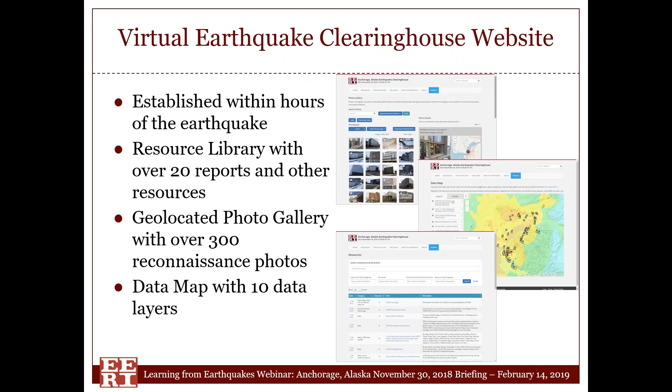Those photos and the associated data map where they're displayed includes 10 data layers and have been informed by many different reconnaissance tools. EERI has some new tools that we're using to collect data that we had colleagues in the field using, and we're able to incorporate data from EERI colleagues as well as many others and overlay this at this one go-to place for earthquake information. So I encourage you to visit this website after this briefing if you want to learn more or dig into those resources.

We also had a virtual earthquake reconnaissance team deploy after the earthquake. This is a new aspect of EERI that we've been developing for the last couple of years, where we have a whole team of volunteers that are ready to activate immediately following an earthquake. And what they do is they start by developing an overview of the impacts, doing a thorough internet search of all the online resources, from social media findings to online reports to any technical announcements that we're seeing from the emergency management field, and they compile it into one big overview to help the Learning from Earthquakes program define their activities, but also to inform the broader membership.

We also have this team of virtual volunteers who are ready to activate, and we offered our support to other teams and colleagues in the field, and many of them volunteered to help two particular activities. They supported USGS researchers who are studying human behavior by gleaning a variety of internet sources to find video of the human response to earthquakes. They also have been supporting EERI's business impacts team that I'll describe in a moment, to gather a list of businesses that have been impacted by the earthquake and suffered damage. So it's a great volunteer effort, and I thank all the VERT volunteers who helped pull together these resources.

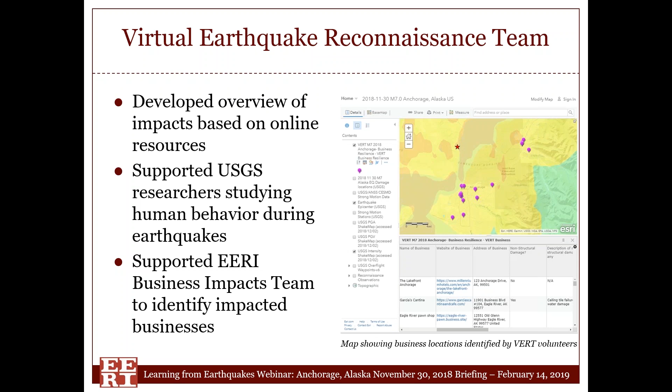As I said, we also hosted our Clearinghouse Briefings. This was on behalf of the NEHRP agencies with participation from many colleagues. We had over 100 participants across 10 different Clearinghouse briefing calls. First, they were happening every couple days, and then have expanded in time, and we even had one as recently as January, so that as the information and findings and response continues to this earthquake, we can continue to monitor that over time to inform the broader earthquake community. We also supported and collaborated with 12 reconnaissance teams that joined our briefings to coordinate and collaborate and identify ways that they could align their work.

We're also launching what we're calling a business impact reconnaissance team. This is a program that we've been working on, and after 2 pilots for earthquakes in the South Napa earthquake and Cushing, Oklahoma, we're now deploying our business survey again. The objective is to correlate physical damage to businesses, from their lifeline impacts to physical damage and loss of inventory, and then correlate that to how that affected the operation of their business. And using it as a tool to see if we can measure and better understand the keys to business resilience, what makes some businesses more resilient, and what aspects really were beneficial in their response, and seeing some of the cascading impacts of the many different aspects that affect a business operation.

This is a well-established survey that we've developed through a group of volunteers over the last several years at EERI that we're hoping to deploy again after future earthquakes. It actually has a series of surveys that can be deployed over time, and the first round of the survey for Anchorage, Alaska will be deployed in February in person by a small team, including some volunteers from Alaska, from our regional chapter.

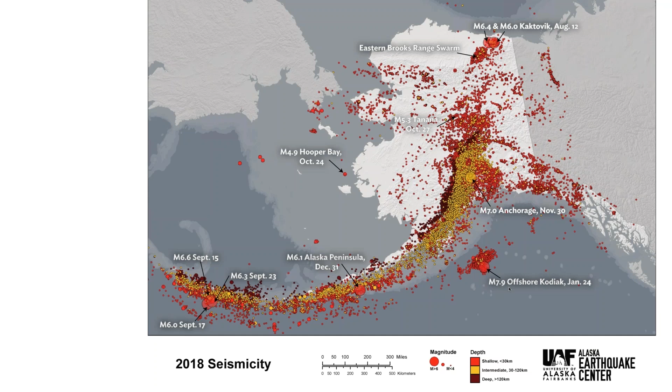The earthquake that occurred on the 30th was fully consistent with historical seismicity. I can't say that anyone in the geosciences was necessarily surprised by it, though certainly the magnitude and location, it is not a common occurrence. If we look at the figure here on the screen, we're looking at earthquakes of all magnitudes recorded in Alaska over the past year. So this is 2018 seismicity. And I put this up to provide some context for where the November 30 earthquake occurred.

The color coding on this slide, red earthquakes are shallow, basically crustal. Yellow earthquakes are intermediate depth, say down to about 120 kilometers, and then the maroon ones are quite deep. And that transition where the November 30 earthquake occurred from red to yellow to maroon illustrates that this occurred on the downgoing Pacific plate. We'll take a look at that in a minute. But it's really quite consistent with historical events and smaller magnitude, day-to-day, if you will, seismic activity.

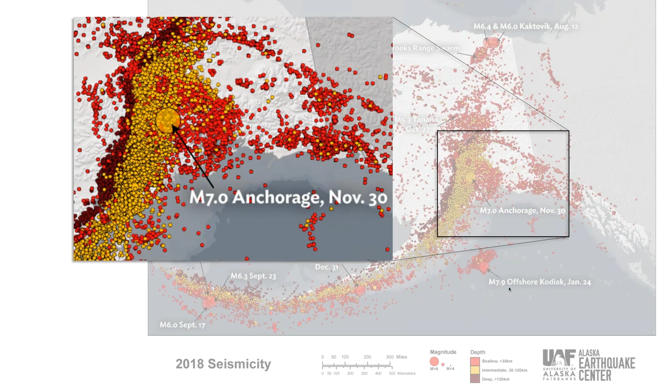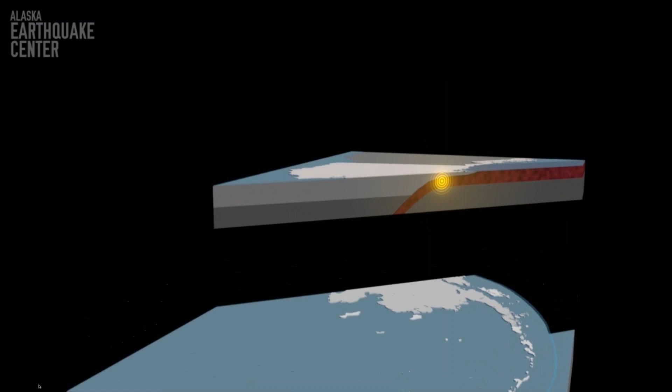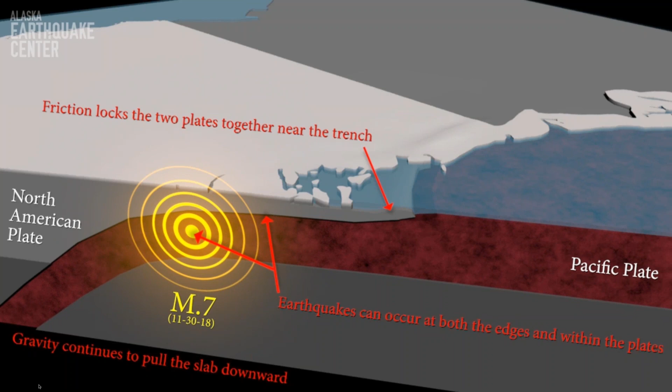But if we look at the two plates which come together in Alaska, do a little cross section and look at the Pacific plate as it subducts beneath North America, the location of the November 30 earthquake shown there demonstrates to us that it occurred further down dip than the locked zone, the region where we see big subduction zone earthquakes like 1964. This was more inland or more inboard or down dip, however you want to phrase that.

But it is fully consistent with earthquakes. Even just a few years ago, there was a similarly sized earthquake a little bit further to the southwest, magnitude 7.1 in January 2016, at these what we would refer to as intermediate depths.

Moving on to the next slide here, this is a cross. Oh, actually, I wanted to point out one thing. Forgive me for backing up here, but something important. You should have in front of you now the slab contours figure.

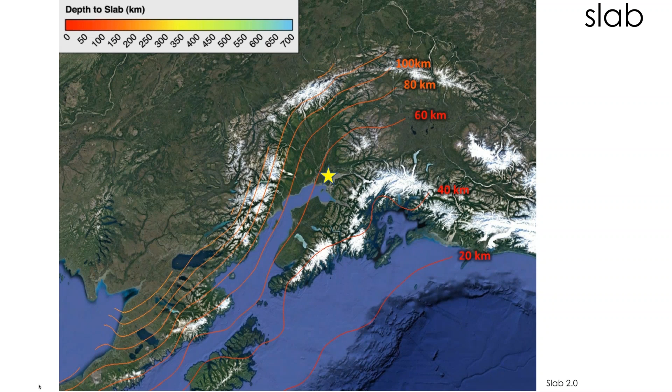And what I wanted to point out is it comes as a surprise to some people that the direction of subduction in this area is primarily to the west. We think of the Pacific plate often as kind of moving northward, but here there's a bend in the plate, and so the down dip direction is actually to the west or slightly west northwest.

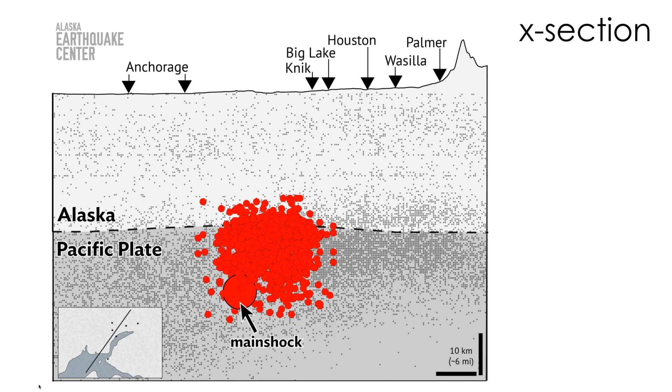And it also shows that the main shock, this magnitude 7, began at the southern end of the rupture, and over the course of several seconds, ruptured upward and toward the right of this figure. So the area kind of mapped out by all of the subsequent aftershocks. So the earthquake began closest to Anchorage, and over several seconds ruptured about 20 kilometers of fault toward the north and away from downtown Anchorage.

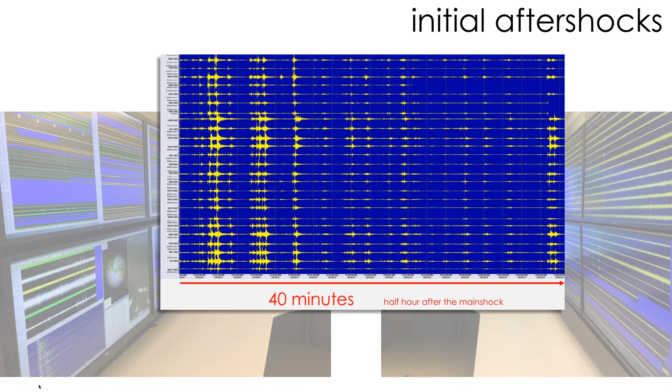It's been a very vigorous producer of aftershocks. This is a shot we're looking at of several seismic stations around the Anchorage area just in the hour following the main shock, at which point in time aftershocks were occurring at least every minute, not necessarily large enough to be felt, but a good percentage of those were.

There's some anecdotal evidence that aftershocks have done some additional damage in other areas. I'm actually hoping that other speakers might touch on this. Wink, wink. We've certainly heard that from people anecdotally, but I'm not sure of any systematic survey.

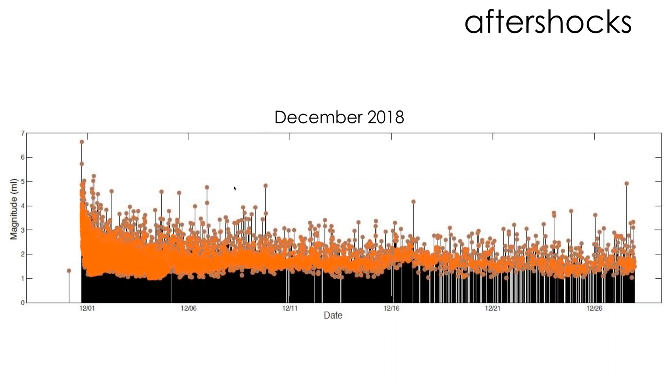If we look at the rate of aftershocks over the first 2 months and project forward, if the rates we've been seeing remain steady, or those patterns remain steady, we expect that within about a year, it will become difficult to distinguish aftershocks from what you might call the routine background of earthquakes that we are accustomed to in this area. It's not an aseismic area. There's plenty of earthquakes month to month, year to year, and we're anticipating within about a year we'll be playing that game. Was that an aftershock or was it not?

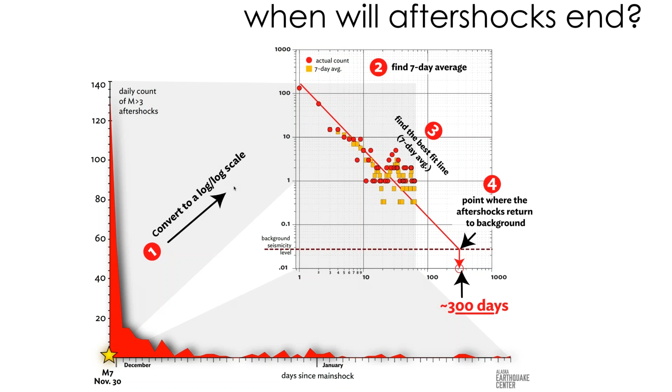If this is not a view of fault mechanisms that you are accustomed to seeing, essentially these are classic, very clean. If these were on the surface, we would call them normal faults. Personally, I hesitate to use that word when it's embedded inside a tectonic plate that is deep beneath us, but I think they should be thought of as normal faults. And what they tell us is that those are likely related to extension or tensional forces within the plate. We'll look at a figure in just a moment of that.

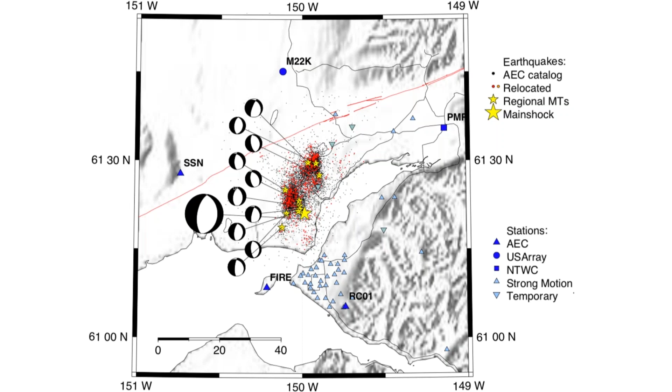So some combination, as this plate is pulled into the earth, of either tension or bending forces within the plate. I will say at this point in time, there's some evidence that the rupture extended beyond a single fault plane and perhaps involved some motion on two different faults. That is an area of ongoing investigation, so stay tuned.

One last thing I wanted to point out about the depth of these earthquakes and this particular mechanism, the reason I'm dwelling on the tectonics, is that there's nothing to map. These are not faults that you can go out and trace on the surface of the earth. They are not features that you can study geologically. And so they present a very real challenge for seismic hazard analysis.

We really have very little understanding of, well, I guess we know the where, but when earthquakes and of what size earthquakes like this can occur. It's a different breed of earthquake than the crustal and the shallow features that we are accustomed to being able to measure and integrate cleanly into seismic hazard analyses. With these earthquakes, in many ways, all we have to go with is a relatively short historical record.

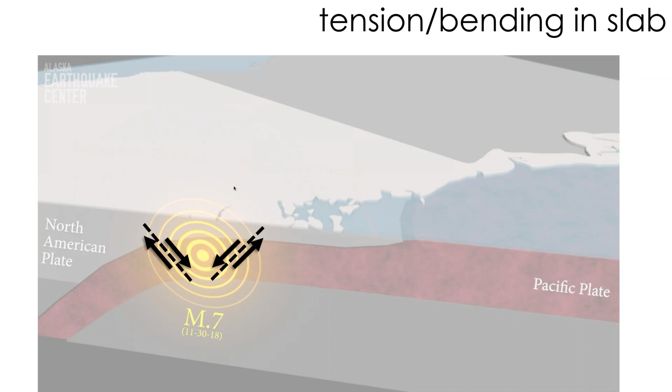So unlike a major crustal fault, where we might say, hey, we just had this very significant fault, we're going to consider that section of the fault relieved for now, and maybe we'll focus attention on the surrounding areas. We really don't know what's going on here. It's very hard to speculate on what future earthquakes could or could not look like in this area, or how this particular event changes that understanding.

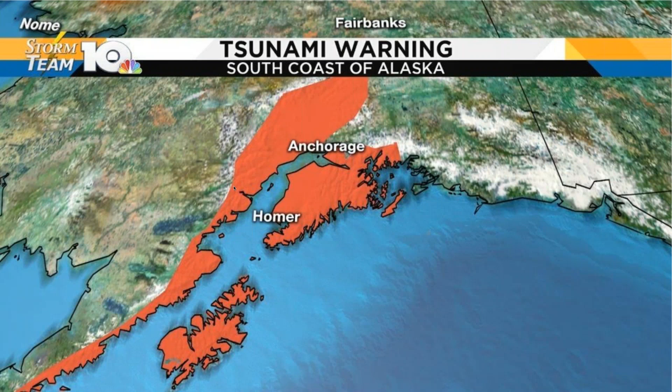There are quite a number of coastal failures that we have seen in previous earthquakes that I wouldn't have wanted to be down on the beach on this day, at least not nearby. There are clearly some lessons learned about the delivery mechanisms of warnings. Clearly, the warnings are being spread a little too far to people who certainly don't need it. However, the basic call to issue a warning was, in my opinion, prudent.

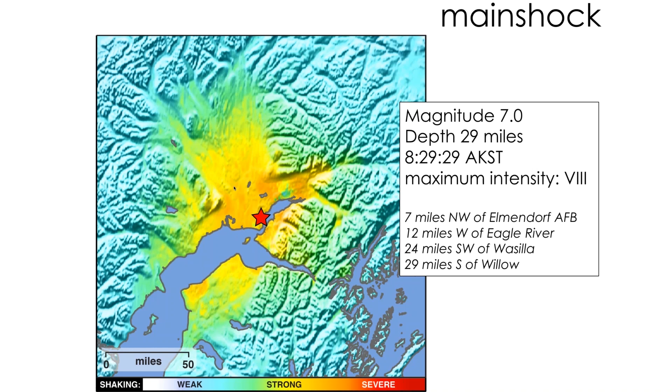This is a magnitude 7 earthquake, but we did not see the most extreme shaking that can occur from a magnitude 7. We are fortunate, I think some other presenters may touch on this, but we do have good instrumental recordings around the downtown Anchorage area proper. That has seeded a lot of very interesting follow-on research to this event.

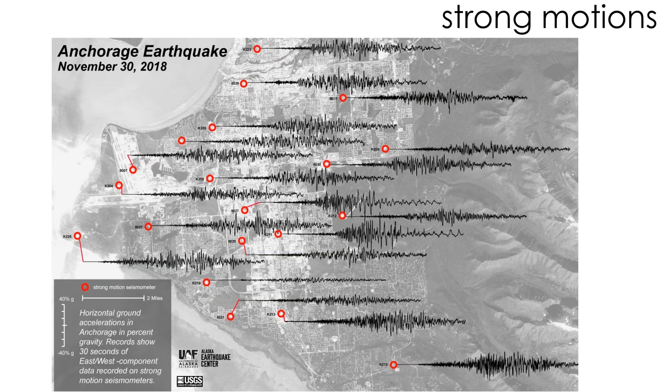I would point out that once you get outside of Anchorage proper, the quality, the availability of instrumental recordings goes down precipitously. As we worked to put together peak ground acceleration maps and similar products, we were certainly stretched to find suitable data to include outside of Anchorage proper.

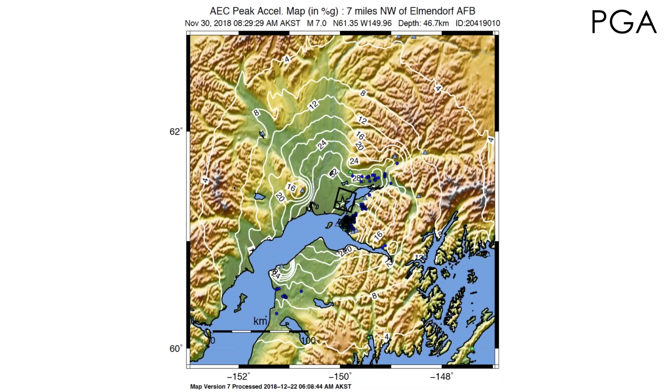The products that many people are using, the ShakeMap distributed through the USGS, we made a conscious decision to include in that Did You Feel It reports. The suitability of that is still debated by some people, but we made a conscious decision to include those in the numerical calculations here because of the sparsity of data in outlying regions like Eagle River, Palmer, and other areas.

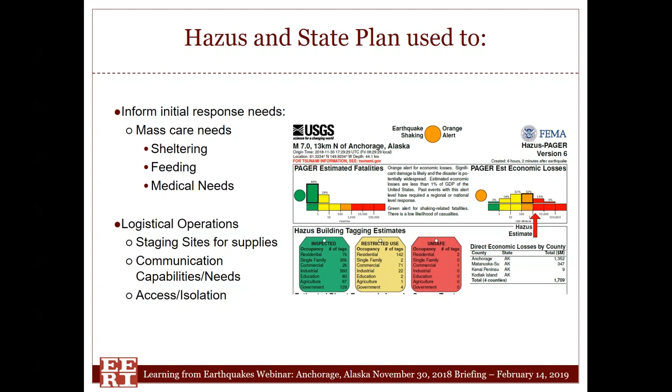And then we also have our own logistics group that coordinates directly with the state's logistics team to identify areas for staging supplies, bringing out communication capabilities such as sat phones if needed, and then looking at, are there areas that are isolated? What do we need to do to be able to access them and get them needed supplies? So the PAGER report is incredibly useful for us. The Hazus report and the modeling done by our headquarters modeling team was also very helpful.

We posted the information from our modeling onto FEMA's GeoPlatform, as well as in an earthquake incident journal. And I've got the link for this up here. For those of you that have the slides already, I've made some updates with pictures and a little bit more information. But this link should work. I'm working with our GIS folks to better understand what information we can share and what we can't.

PII information, personally identifiable information, can't be shared. And you know, we don't want to spread information that is not field verified either. But there are some pieces of this earthquake incident journal that are publicly available. So you can click that link and see what comes up for you.

But initially, we were using the Hazus and the PAGER information to see, based off of the model, what areas were likely to be most impacted. And I'll get into that a little bit more in a moment. But you can see we were also pulling in the municipalities' information on red, yellow, and green tags for buildings being inspected.

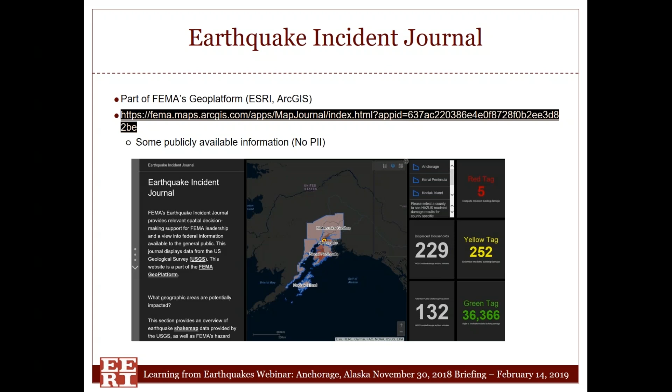So this part is some of the red tape that you might hear about, but I wanted to talk a little bit about the disaster declaration process. So when the event happens, the initial earthquake, the state makes a preliminary damage request. And upon initial event, there isn't a presidential declaration yet. So you'll hear words like emergency proclamations or maybe a local emergency declaration, but those are not the FEMA declarations signed by the president that issues funding.

So in order to get the presidential declaration, there's some steps that have to happen first. So the state will make a PDA request, which is preliminary damage assessment, and that brings in local and state partners, as well as the Small Business Administration, to go and do inspections for both public infrastructure as well as individual, which would be residential. In this instance, FEMA actually came along and did the PDA inspections with the state and local and SBA, which isn't typical, but it really helped us expedite some of our processing.

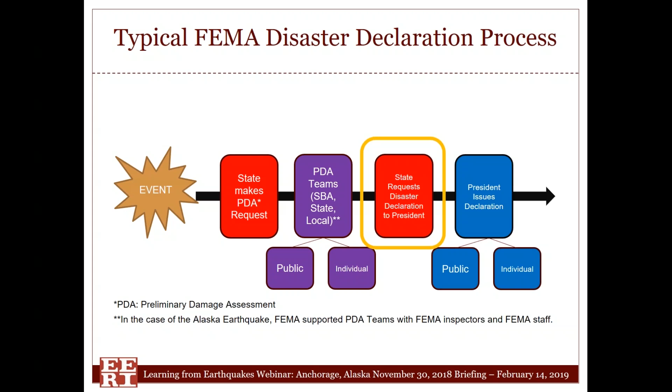Based off of the preliminary damage assessments, it was determined that the cost for the disaster was $48 million thus far. And again, that was with the focus on the high damage facilities. That doesn't include all the little things that weren't inspected, because we were only focused on the big number things. But through the Stafford Act, there is a threshold that has to be met that states that the amount of the damage has to exceed the state's capabilities, and that's determined by census numbers multiplied by a factor of, in this instance, the per capita indicator of $1.46 per person.

So the state made that disaster declaration, and the shutdown eventually ended. We'll find out more tomorrow about that as well. But the declaration was made by President Trump on January 31st, and that provides public and individual assistance for 3 boroughs. It includes the municipality of Anchorage, the Mat-Su Borough, and the Kenai Peninsula Borough. And one fact that a lot of people don't realize is when there is a statewide disaster, there are disaster funds, but hazard mitigation money becomes available statewide, and that does include tribal lands. It is up to the state's discretion where that money gets spent, and we'll get into that now.

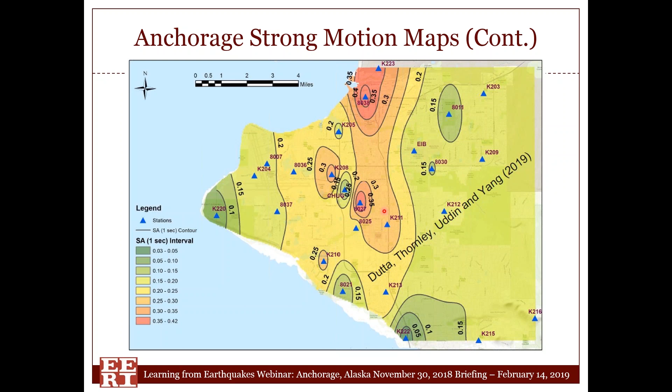The geotechnical damages were not just limited to Anchorage, of course. We had quite a variety of different geotechnical impacts around south central Alaska. Numerous structures were impacted by ground failure of different types. We did see liquefaction. And we also saw some lateral spreading, and some of the lateral spreading may have been a result of having that frozen crust over a liquefied zone.

Settlement of poor quality fill materials. We saw numerous indications of fill materials that had settled due to the ground shaking, causing a significant impact structurally to residential structures primarily, but we saw this in commercial and public buildings as well.

Then we saw a number of slope displacements as well. We saw these primarily in fill materials, but there were a few natural slopes also that had indications or showed signs of movement.

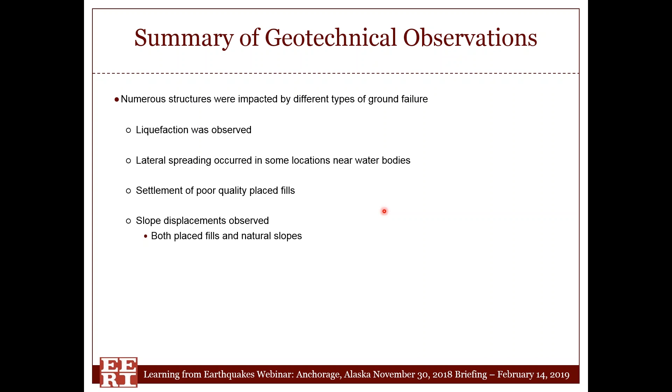Interestingly enough, talking with the USGS, who did a number of flyovers to evaluate slope instability reactivation from some of the 1964 slides. They wanted to see whether those had reactivated, and saw very little sign of reactivation of those slopes. And so the primary bad actor tended to be in the fill slope area.

So talking a little bit about different elements of the geotechnical impacts, a lot of people saw liquefaction within their crawl spaces. Floor slabs in residences were found to settle in some areas, and clean sand was found as ejecta, both in structures and in neighborhoods.

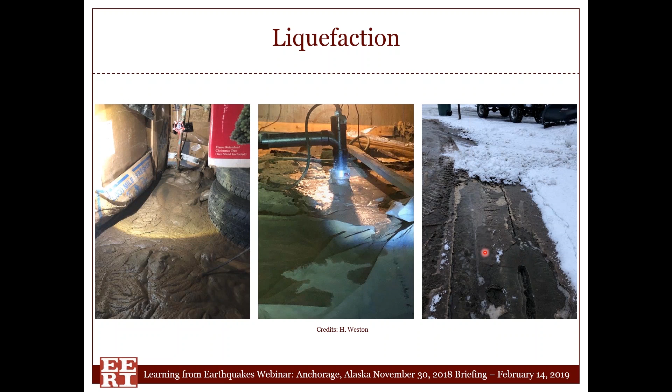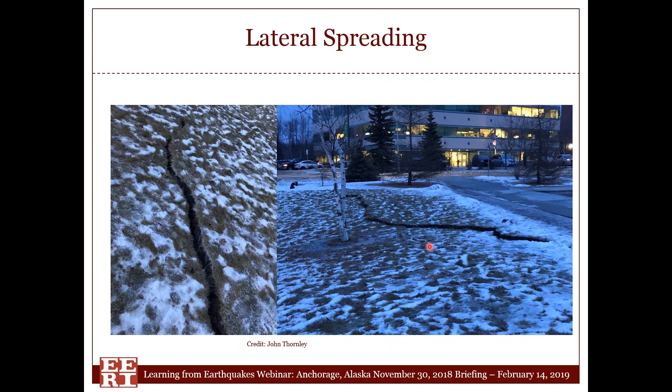Saw some lateral spreading. Most of the lateral spreading that I'm aware of was fairly minor. This is an example of a poorly placed fill material that moved laterally towards a pond within the Anchorage area. The cracks were roughly 4 to 5 feet deep, but only a few inches of vertical displacement and lateral movement. So lateral spreading did occur, but was fairly minor in locations observed.

Oftentimes, we pride ourselves in Alaska for the off-the-grid nature and kind of the frontier state. And so when you have an uncle or someone with a piece of yellow iron, a grader or something, and they help you build your building pad, maybe you didn't get compaction testing and verification of proper fill placement as you go to build on these areas outside of the building service area, certainly, as Amanda pointed out. And so there is some concern there that while maybe the house was built to code, the soils that supported them may not have been, which then caused some damage.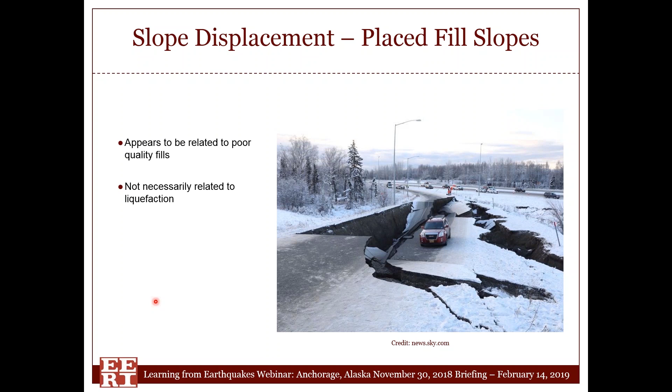Slope displacement again, relating to poor quality fills potentially. Another poster child photograph of the interchange going to the International Airport for Anchorage. Somewhat busy area, but again, not necessarily related to liquefaction, but potentially soft ground and poorly placed fill materials.

Lateral displacement of fill slopes. We seem to see quite a few fill slopes that have displaced, some of them more significantly than others. In this photo, you can see slope displacement indicators at the top of the slope, but also coming back towards the house. And this was fairly common as people expand their lots and push materials out.

Some of the questions about this fill placement are proper or improper native slope preparation. Were good practices imposed with benching and keying in the slopes, removing organics off the original slopes, and other construction-related practices? And so as engineers go to study some of these things and to help homeowners and other owners of structures get back on their feet, we'll be seeing more results of whether we had improper fill placement or not. And we primarily saw these in residential areas as well as roadway embankments.

And a little side note on the roadway embankments, oftentimes with AASHTO design, if we have a low factor of safety from a numerical model, a factor of safety below 1, then we can also design for displacement. And so when we have accelerations like we saw from the November 30th earthquake, when you do a back analysis, it's not a real surprise that we saw slope displacement on some of these steeper slopes, 1.5 to 1 to 2 to 1 slopes, that indicate in our calculations that we should see some movement. We're not terribly surprised that we do see some of those movements.

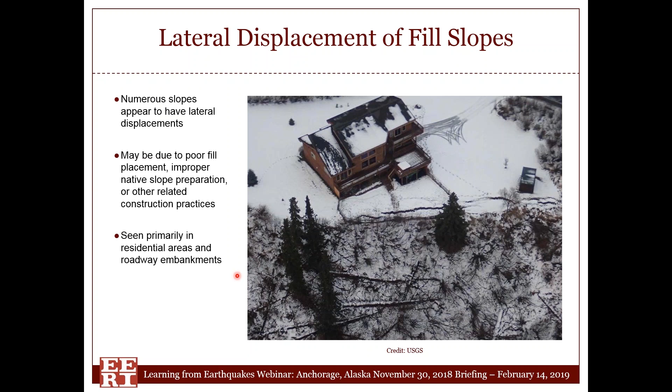Natural slopes: there were very few natural slopes that actually moved or were observed to fail. This is a photo of one of them in the south part of Anchorage, where upon further investigation you can see in this photo that there was some movement there, but a lot of this primarily had to do with saturated slopes. And in areas adjacent to these, not seeing seeps come out of the embankment, you can assume that maybe they were a little drier and had less saturation. But again, there were very few natural slope displacements.

One of the significant differences between the 1964 earthquake and the November 30th earthquake, other than magnitude, was the duration of shaking. The shaking lasted for roughly 20 to 30 seconds, whereas it's documented that in the 1964 earthquake we had greater than 4 minutes of shaking. And so if we had gone for, say, another minute or two, we might have seen further damage to these natural slopes, but we just didn't quite see that. And probably for the benefit of South Central Alaska too.

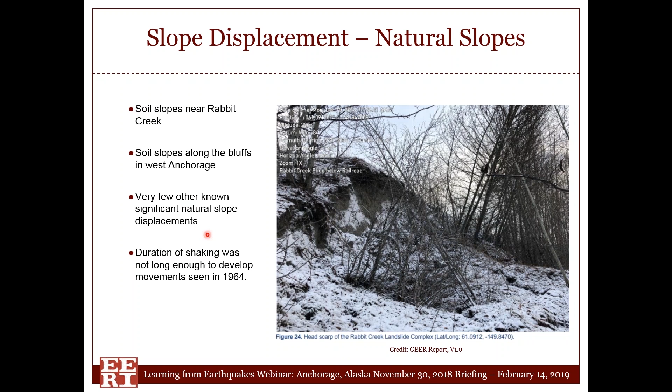Touching on buried utilities, Anchorage Water and Wastewater Utility recommended boiling water for several days after the earthquake due to some water line damages. There is a work in progress right now to collect that damage information, and EERI will be tying that into our summary report, so be looking for that. But there's, as I pointed out in the liquefaction slide, a number of connection issues with residences and others due to some liquefaction damage. But all in all, there appears to be a relation between older water and wastewater utilities and some of the damage that was experienced. But more to follow on that.

One kind of interesting, not on your typical track here, is the impacts to water wells, and there were a number of observations of dirtier water in the days following the earthquake. A surprising number of people are on community wells or individual wells, even within the Anchorage Bowl. And then as you move outside of Anchorage, nearly everyone is on a well

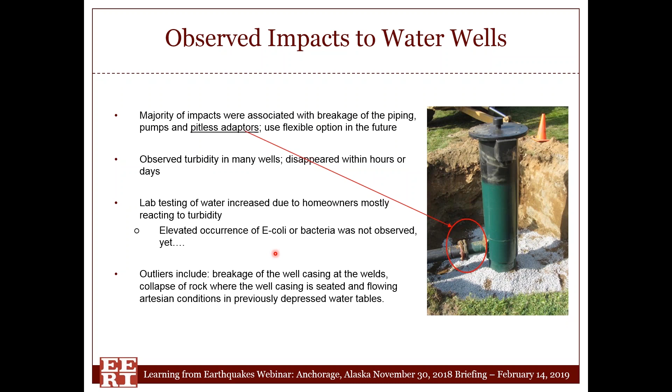that's not in some of these more built-out areas. And so there were some issues with pitless adapters shearing off, observed turbidity, and then the lab testing suggests at this point that while there was an increase of testing, there hasn't been an increase in E. coli or bacteria. But one thing that's worth noting is that in the spring, as we start getting surface melt and other things, we'll see potentially if there are other impacts to water wells.

So in conclusion, the earthquake highlighted the importance of geotechnical best practices. There is significant structural damage that's been attributed to geotechnical failures, and the ground motions, at least across the Anchorage area, varied certainly with geology. And as we continue to work with others to look at the strong motion stations outside of Anchorage, I'm sure that we'll see something fairly similar to that.

Liquefaction, lateral spreading, poorly placed fills, and some slope failures are the primary geotechnical failures. And then impacts to buried structures or buried utilities are a work in progress. And just to point out, this 12 inches of frost that we had may be masking issues that we may end up seeing more of in the spring as seasonal frost thaws out.

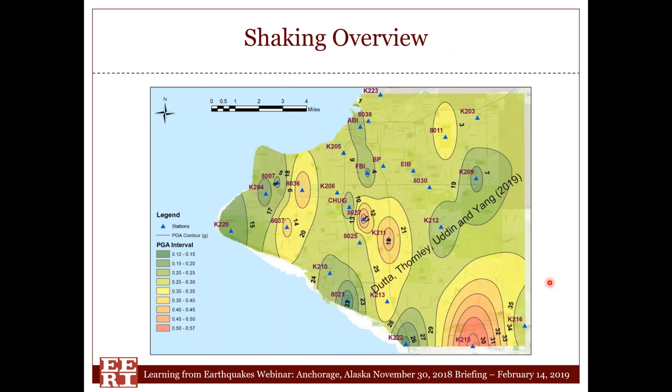It's very important to note here that the level of enforcement varies a lot between different areas. Anchorage is the most well-enforced region compared to the other cities north and south of Anchorage, and other boroughs in Alaska. So that might help explain the different types of damage we've seen around the area. I'm not going to go over details of the shaking map again, but I'd just like to do some correlation to the observed damage.

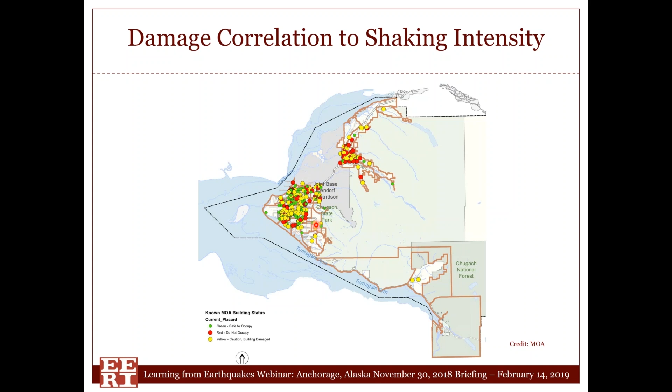So we can see here the municipality of Anchorage inspection map in the south. Here we see Anchorage, here are the northern communities, and that's about 10 to 15 days after the earthquake. And we see here the distribution of red tags versus yellow and green tags. If we close up a little bit, this is Anchorage on the left, and these are the northern communities here.

We try to see some correlation between the distribution of red and yellow tags in Anchorage and the shaking maps. And we note that it's pretty well correlated in most regions, except maybe in South Anchorage where the most shaking took place, because primarily those are one or two story residential buildings. Most of them are new, upscale buildings. So that might explain the reason, but we're still looking into why there wasn't so much damage here.

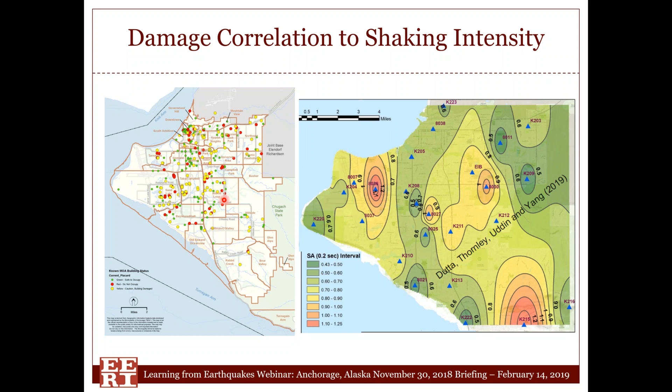The new map is coming, and it's more advanced and includes much more information. I hope I can show that during the EERI meeting next month. And also, in light of the 0.2 second spectral acceleration and the 1 second spectral acceleration, it can help show us the correlation to damage. So it's very good to take some time to look at correlating damage to the accelerations here.

So this map shows the municipality of Anchorage inspection data as of yesterday. In Anchorage, there were a total of about 3,000 requests for inspection, or a little more. In the Anchorage area, out of the inspected buildings, which are about 1,300 buildings, there were 28 red tags, representing about 0.025% of the building stock in the municipality, versus 606 yellow tags.

If we compare those numbers in the northern communities, where we have about 851 buildings inspected, we have 62 red tags representing 0.43% of the building stock in the northern communities, which is about 17 to 22 times the ratio in Anchorage. And again, that emphasizes that enforcement of the building code in the northern communities is very weak, if present at all.

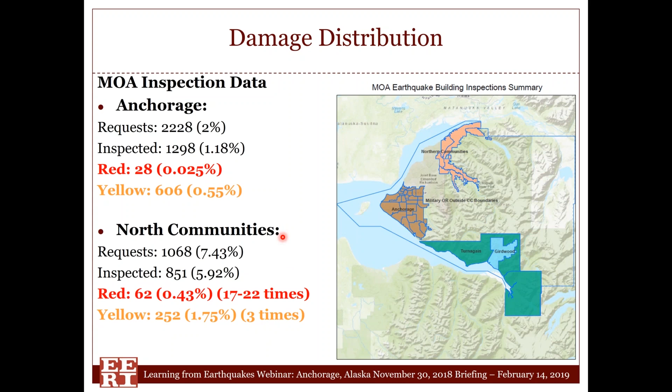And I have to point out here that it is not only in residential construction, it's also in commercial and retail buildings. There is no building code enforcement even for those. And we've seen a lot of non-structural damage and some structural damage in the non-residential buildings. So I'm going to summarize very quickly some of the observations on structural, non-structural and equipment damage, and then we'll go over some examples.

So a lot of the structural damage was due to ground failure, as John has said earlier, and most was in the single-family residential building foundations. And there's also a lot of non-ground related light to moderate structural damage, as I said, and we'll see some examples shortly. So in older construction, as we may expect to see, there are problems like cracking in shear walls.

We also see the CMU wall cracking and detachment from floors and from framing. And we see also the CMU diagonal cracks. We see out-of-plane masonry wall buckling. And also we see the wall foundation offset from the buildings, and detachment of wood wall corners in residential buildings. So those are the most common types of structural damage that we observe.

In terms of the non-structural damage, the most common observed was the glass facades, of course, and windows in low-rise buildings, and also a lot of suspended ceiling tile falling and damage, including the entire grid, not only the tiles, and sometimes snapping whole segments of the ceiling. And of course, the firefighting system damage and sprinkler head and water pipe damage was very widespread in different types of building, especially at connections.

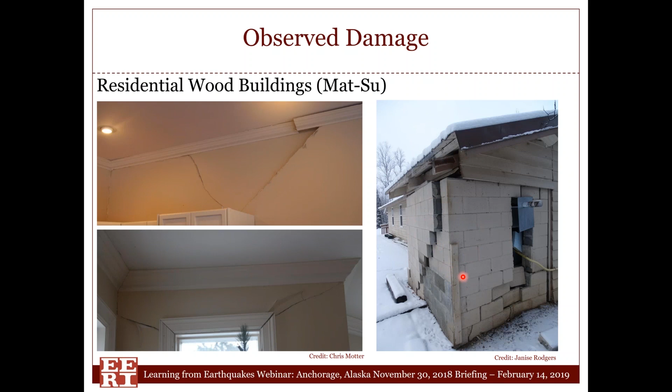We see heavy structural damage to this building. This is the corner damage out there. And we see from the interior of this building major cracking in the walls and the detachment at the corners, and very wide cracks here. And that's some other pictures from the same building. And we see here masonry confinement to heater damage in Mat-Su Borough for residential.

In terms of examples for commercial buildings, most of the commercial buildings here in Anchorage experienced those damages of water breakage and some suspended ceiling failure, but few experienced the major segments of the ceiling falling, including the grids.

So here we see some of the masonry veneer failure in Eagle River, and this has become now a widespread picture of the masonry wall connection problem here at the top, and this wall, like many others in Eagle River that have the same configurations, has been already propped this way, as you see. And that's some more; of course, Eagle River had heavier damage, as we said.

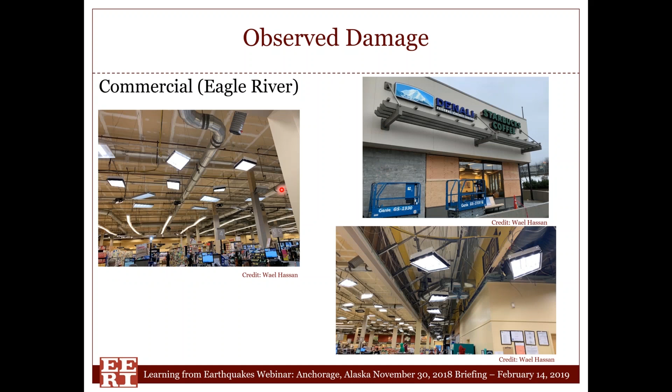So in suspended ceilings, sometimes the entire ceiling was gone, and the glass windows of stores and commercial buildings too. So another example from Eagle River, heavier water damage and failure of the suspended ceiling of the entire store. Examples from Anchorage in office buildings show here the CMU wall connection to the steel girders. We see the steel joists coming off the seat of the wall, as we see here. And that resulted in a failure of segments of the roof.

And that has been a common problem, even in Anchorage, not only in Eagle River, with CMU wall to steel girder connections. So another example from office buildings in Anchorage, we see the foundation of the braces in some braced frame structure, showing splitting and crack damage, and also the grout pads underneath the plate are already damaged, and also underneath the steel columns, we see the same thing.

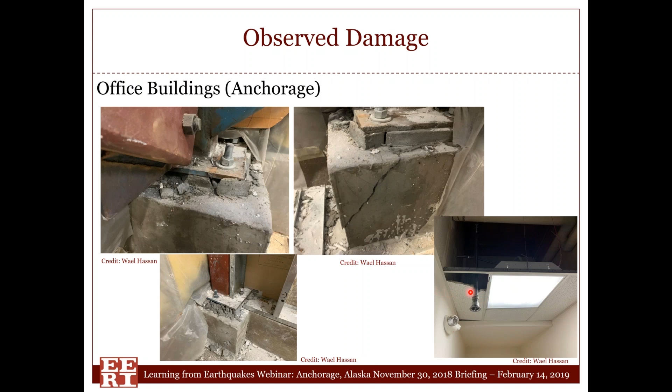And that might be, in my opinion, explained by the torsional eccentricity in the building. I don't think that was related to some geotechnical or foundation problem. So also there's widespread sprinkler damage to the ceiling, as we see here. This photo is very typical. In some of the high-rises in Anchorage, like this concrete block hotel, which is about 14 stories, we see here the shear cracks of the girder at the ground floor that's being treated now.

And it's worth noting here that this crack in the beginning was really small, and then due to aftershocks, it kept widening until it reached about 0.25 inch wide, and led to the whole shutdown of the building and to the immediate need for retrofit of the building.

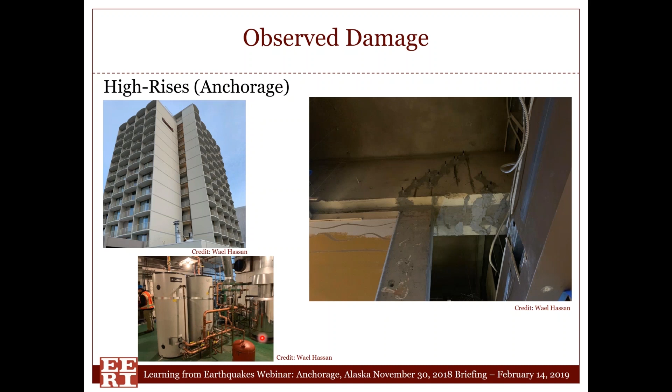And in the same building at the top floor, the mechanical floor, we see the boiler problem. So according to the Alaska Building Code, those big boilers needed not to be strapped or tied to the floor, because basically the hazard of overturning for this large size was not actually there. But what happened, they slid. Instead of overturning, they slid significantly, leading to a breakage of those connections at the top and water flooding of the entire floor and the floors below.

You see here in Anchorage, also in some mid-rise buildings, we see some column flexural yielding potential and some internal cracking in the connection between the core wall and the drywall. We see here also in some mid-rise building in Anchorage the heavy cracking and damage at the facade. I'm going to show some more examples through the performance of the instrumented buildings. There are about 7 instrumented buildings here in Anchorage. Some of them were not able to retrieve the full record, and for some others we were able to do that.

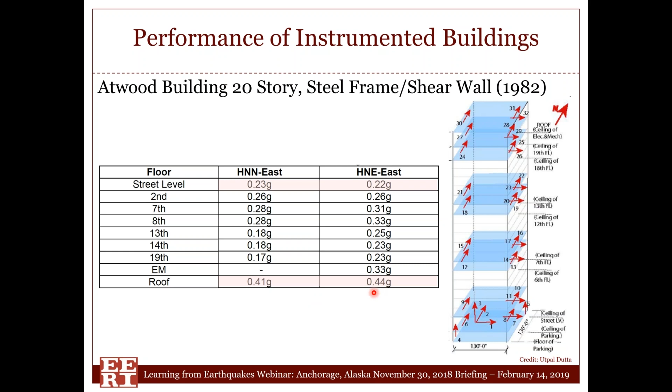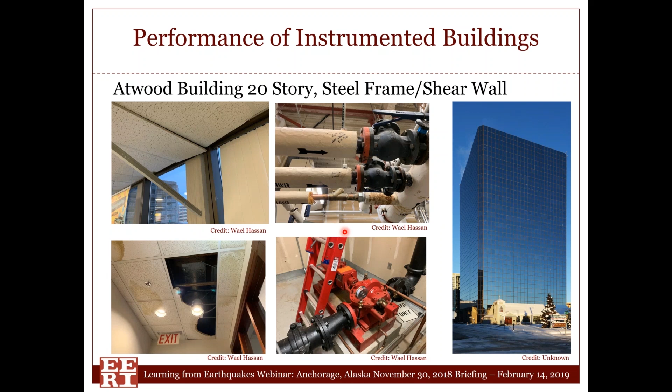So giving the example of the Atwood building, which is a 20-story steel frame shear wall building from 1982, and this is the instrumentation scheme, and you see here that it has about 0.23 g acceleration at the ground level and about 0.41 and 0.44 g accelerations at the roof level, and the damage to this building was basically non-structural damage. And as we see here, the floor, the suspended ceiling grid, and the water flooding also is evident. And also we see here where the water flooding took place; this was damaged during the earthquake at the mechanical floor and led to major water damage. And it's related very well to the recorded accelerations at different floor levels.

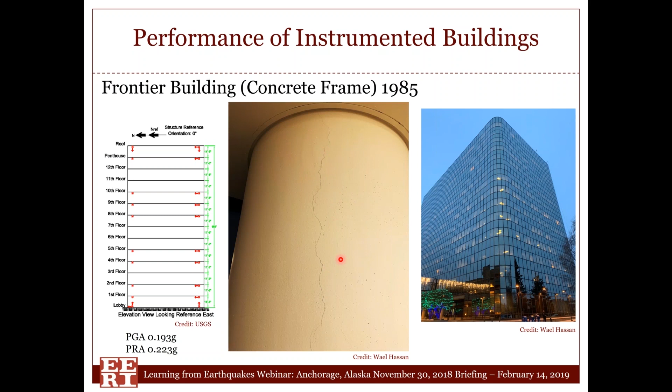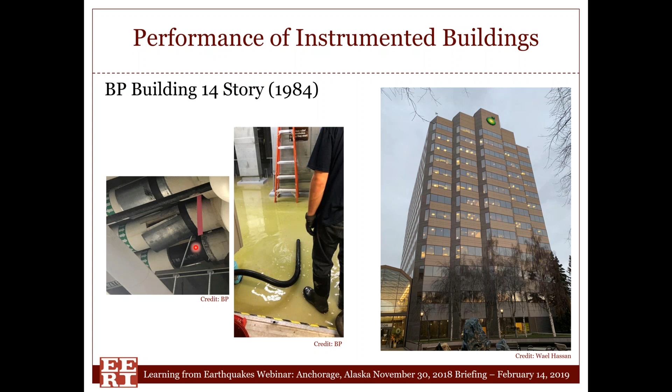This is another instrumented building, which is the Frontier building in Midtown Anchorage, and we see here that there is some overstress splitting crack in a concrete column here, but it was minor, and there was no water damage in this building, but there was also some cosmetic drywall cracking and ceiling cracking, as we see. Not heavy though. This is the British Petroleum building in Anchorage, and there was no major structural cracking or problems. There was basically water damage again due to water piping and firefighting system failure.

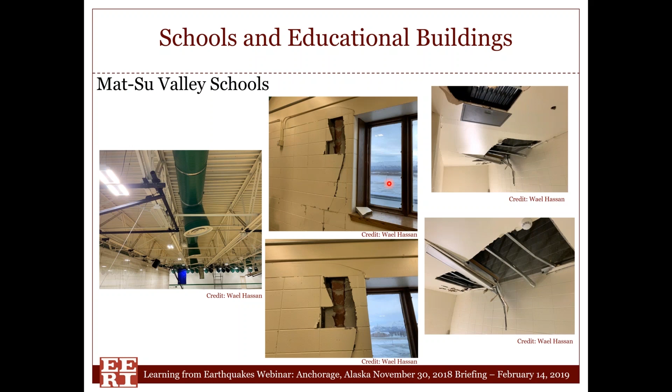We have a shear wall crack here in Mat-Su, and we have also the masonry CMU wall detachment from the steel girder connection. That's another example in a Mat-Su school where we see the CMU wall damage here, exposing the steel frame column. And we also see the deformation of the ventilation system here in the gymnasium. And we see also some ceiling failure that led to very heavy blocks falling off. Fortunately, there weren't any students here. Some more CMU to steel connection failures and suspended ceiling failures in Mat-Su.

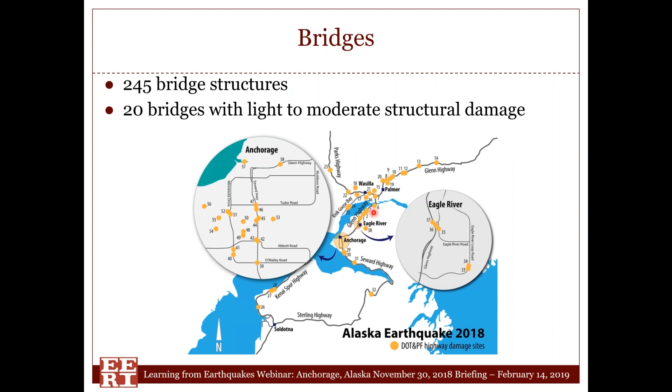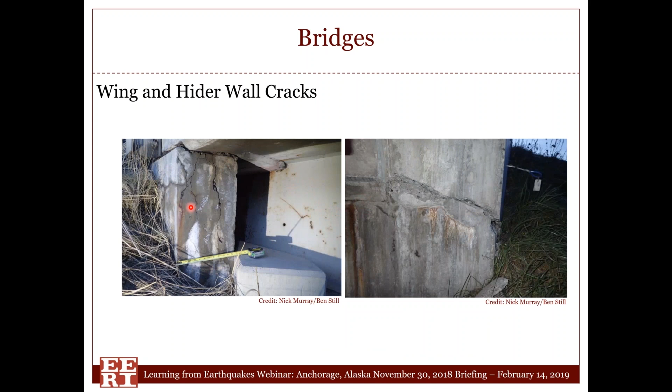The last thing I'm going to talk about is the bridges, and as this picture shows, widespread highway and bridge locations experienced some damage. Basically there were about 245 bridge structures, but only 20 of them experienced light to moderate structural damage. Anchor bolt bending was a major damage that happened in different locations here. Also regarding the wing wall and hider wall cracks, at least one location experienced the wing wall crack. The hider wall crack was more spread out. The abutment cracking is a typical case within those 20 bridge locations.

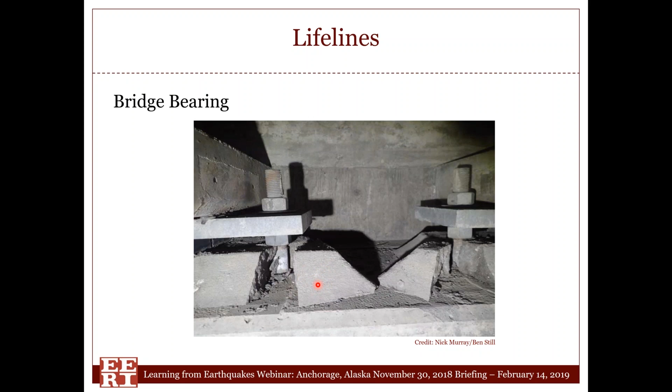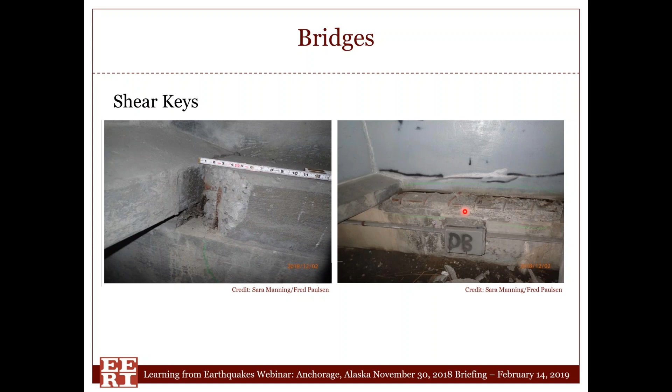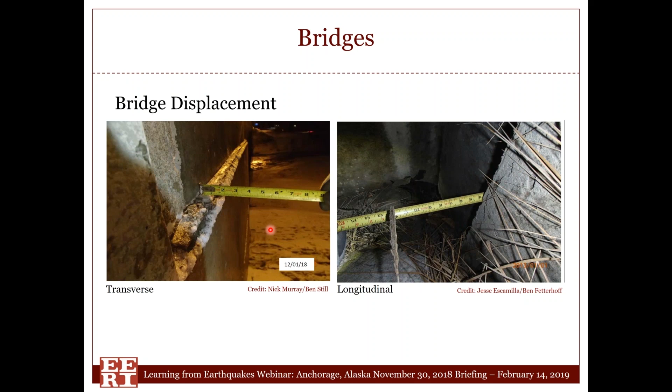And also the bridge bearing large displacements and the bridge bearing pads fracture and splitting were also typical. Shear keys experienced damage ranging from very light to very severe, as you see here, starting from cracking all the way to spalling and exposing reinforcement. So shear key was a problem in this earthquake in bridges. Some of the pier-pile intersections resulted in some spalling. And there was also transverse displacement and longitudinal displacement of the bridge that happened in a few locations at different bridges.

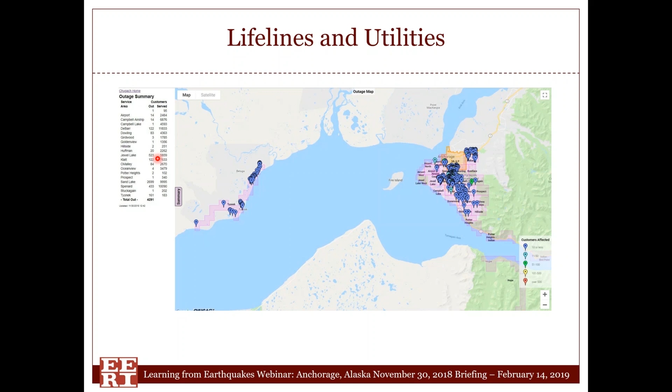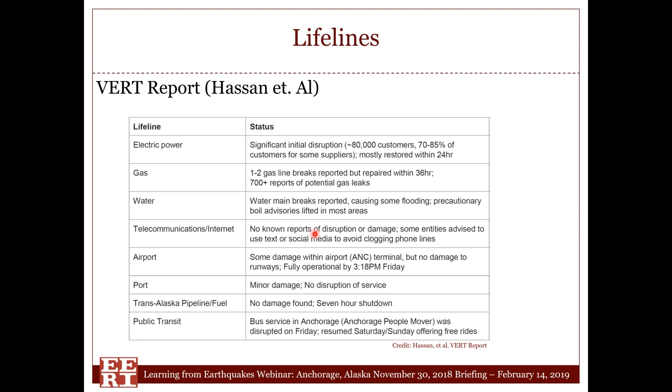I'm not going to talk much about lifelines. The last thing, there was a major power outage. I personally experienced that in my own house. There were about 15,000 requests for service across the area, and they were restored very swiftly. Within 24 hours to a few days, most of them were already restored. More information on the utilities and the lifeline problems can be found in the EERI VERT report, with this table summarizing the initial damage status. And I will be reporting at the EERI annual meeting more detailed information on the lifelines as they are still coming in from the utilities companies.